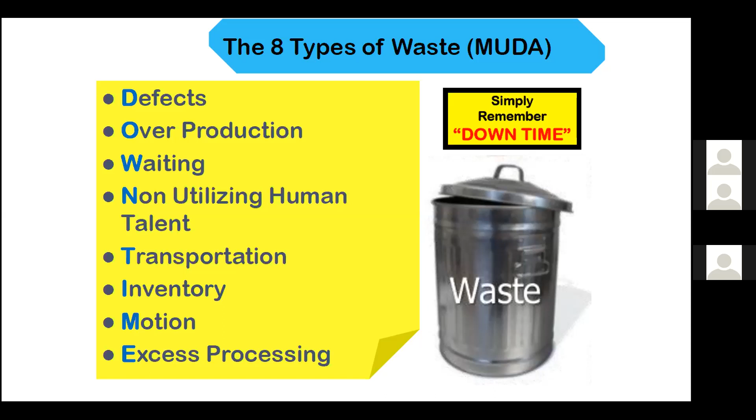D means defects. O means overproduction. W means waiting. N means non-utilizing human talent. I told about the 8th waste, the same one, non-utilizing human talent. T means transportation. I means inventory. M means motion, and E means excess processing. So these are the 8 wastes. Let me go one by one.

So before going into detail, I am just telling you this waste is applicable everywhere. It's not only manufacturing, not only healthcare, banking sector, education sector, everywhere. So I've just put some slides on how each waste is applicable in different sectors. The first sector is education. Let me take any one waste.

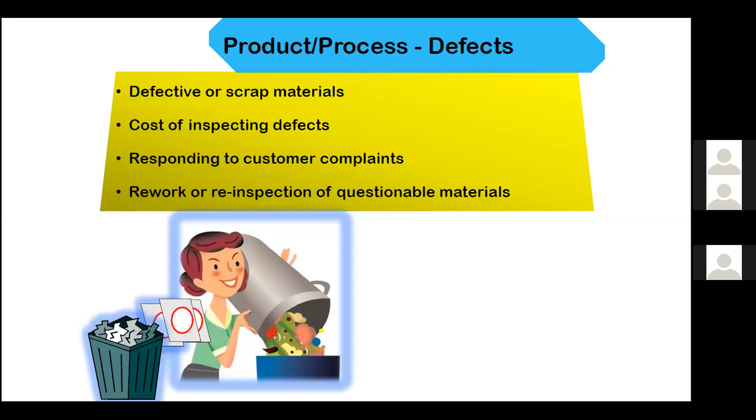So defective or scrap materials, cost of inspecting defects, responding to the customer complaints. Yes, if there is any defect and you find it at the design stage, the cost is very less. If you find it at the processing stage, the cost will be different. Once it reaches the customer, then it will multiply the cost. So responding to the customer complaints, 8D, whatever we do, everything is related to the waste of defects, rework, re-inspection. Okay, so all this is a part of defect waste.

So why must rework, repair, replacement, warranty period be MUDA? Why do we call it MUDA? What will happen when there is an assembly line? Let us assume there is an assembly process. Okay, the first person is doing the work, second person is doing the work, third person is doing the work. Something happens at the assembly stage itself. Whatever effort they are giving, that will become waste. So that is in a production line.

During the warranty period, what happens? Let us assume a customer ordered something from some online shopping center. He ordered a birthday gift for his wife. Due to transportation, or because they delivered a wrong product, when he opened it, he received a different product. So the day became dull. So the customer has a very big wrong impression about that particular process, particular service. So that is very important in defects.

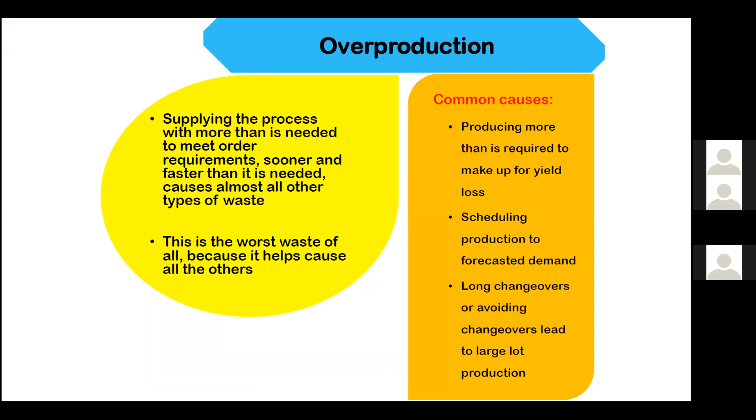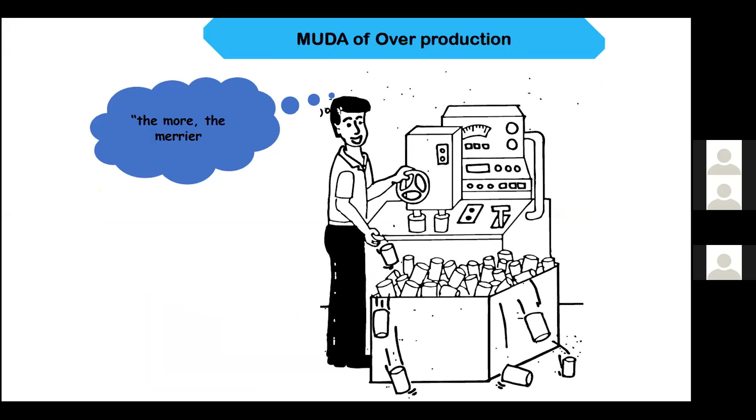If you are producing extra, what will happen? The customer is not happy to buy that. And the second thing, whatever time and man hours you spend will become a waste in this particular process. And if you are producing more files, more product, you don't have the space to keep it, so the respect for the product or process will reduce.

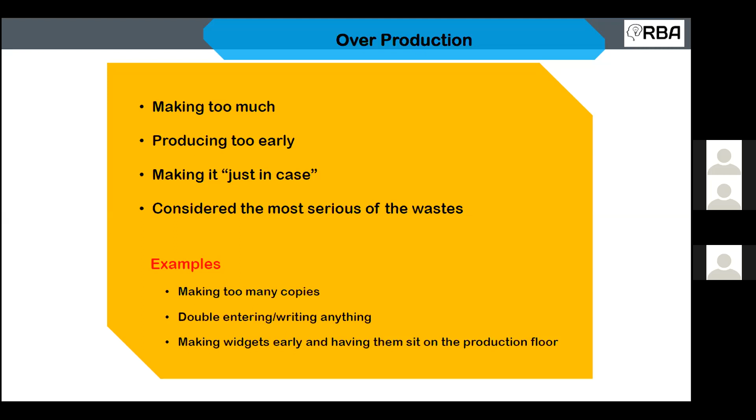How can we identify it? Making too much, producing too early, making just in case. Consider it the most serious waste. Some examples are making too many copies. Suppose we want to take one photocopy, but we are taking 2-3. Double entering the data, entering the data 2 times, repeated data in a mail. So these are the things related with overproduction.

Waiting. So waiting is always the biggest waste, particularly in a service industry. Waiting means waiting for man, waiting for machine, or waiting for process. What should be next? So for any reason, man, machine, method, material, whatever the reason, if the process is stopped and waits, then that becomes waste. What is the impact of the waste of waiting? It will increase your lead time.

Let us assume one person comes to the bank. He wants to apply for a loan. For loan processing, some data is required. He provides the data. If one person is delaying, or one person is waiting for some Xerox copy, or waiting for some person to come and give an approval signature, then normally it takes some 2 hours, but because all this waiting time is added, it will become a 2 days, 3 days process. So nobody will like waiting time. It increases your lead time. It increases your turnaround time.

So normally, what are the reasons we wait? We can remember 4M: man, machine, method, material. Waiting for man: somebody needs to come to give the signature, give this approval, clarify this. Or related with the material, some documents need to come. Waiting for the method, what to do next? There is no clarity, there is no SOP, or in some critical case, how to proceed further. There is no procedure available, no instruction available.

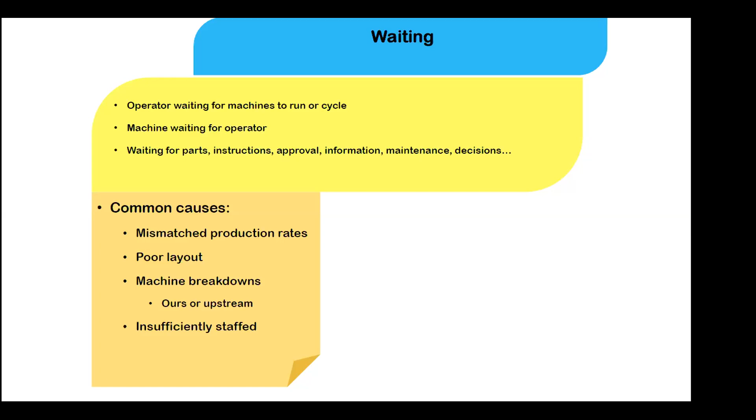So like this, man, machine, method, material. All these reasons we can relate with the machine too. If you talk, there is waiting for some printer, waiting for some photocopier. Because of that, we are waiting. So related with all 4 M's, waiting will be happening. So we need to focus on waiting, analyze for what reason we are waiting, and accordingly we need to take a countermeasure.

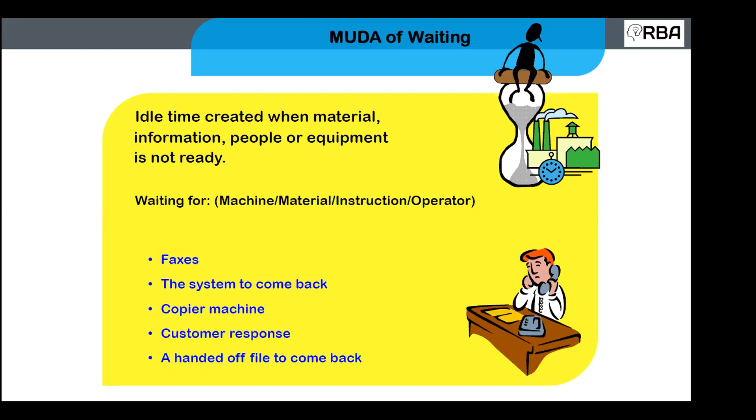So idle time is created when the material, information, people or equipment is not ready. Waiting for fax, waiting for the system to come back, waiting for the copier machine, waiting for customer to respond. These are things we are waiting for. Simple example: the machine is broken down, so the person is simply waiting. But we are paying salary to the person also. The machine is broken down, what will he do? He is waiting.

Unutilized human talent, non-utilized human talent. So how can we identify this particular waste? If the person has good skill in particular work and you are not allocating that work to that person, that is the greatest example of non-utilizing human talent. Let us assume one person has very good skill in customer care or marketing, but we are putting that person into core operations, so we are not utilizing his skill. In a manufacturing process example, the person has very good skill in painting, but we are putting that person into the welding department. So we are not allocating the job as per his skill. That is one example of non-utilizing human talent.

Another way: the person has a good idea, so he is giving one suggestion. Instead of this, if you do like this, we can reduce the people waiting time, so we can attend more customers. But if we are not hearing his idea and not implementing it, that is also called human talent waste.

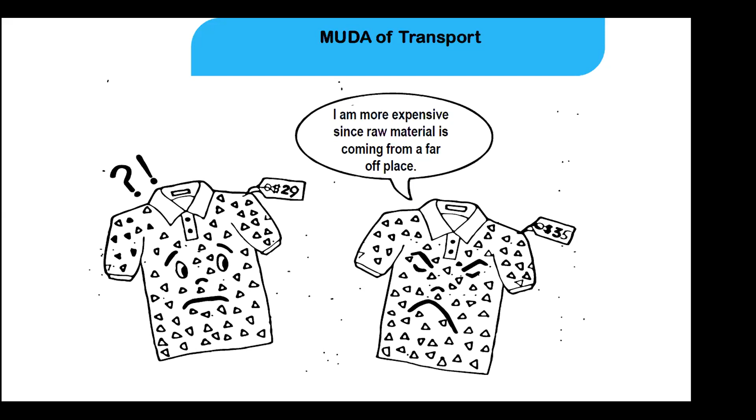Suppose my supplier is at a very long distance. I cannot buy from nearby suppliers because they are too costly; I can buy only from the long-distance supplier. It's okay. We cannot change that supplier's position, and we cannot change our position because of that supplier. So what is in our scope: within our plant, our service area, our hospital, our bank, how can we reduce this transportation movement? We can focus on that.

So carrying documents from one area to another area, taking files from one person to another person, going to get the signatures. Let us assume tomorrow is a holiday; due to some reason we need to put the college on leave for all people. So the communication needs to go to all department HODs. What happens? There is one attender, he will take the circular. First he'll go to the principal's office and take the signature, then he needs to go to all the department HODs to give this communication and get the signature.

So all these HODs, all these departments are not very close together, no? So the person needs to walk here and there along with this material for too long. So transportation is very long in this situation. So we need to avoid the transportation by providing the communication in digital versions. Use WhatsApp or emails, phones. We need to use like this.

Inventory. So inventory means anything more than required. If you are keeping that, that is inventory. So if I'm doing one at a time, everybody is able to work on one file only, I hope. So we are able to concentrate. We cannot concentrate on more than 2 files. More than 2 files at a time is very difficult. Myself, I cannot concentrate on more than one file at a time. But if you are keeping many files on your table to show off, 'oh, I'm working on huge files, I'm multi-talented', if you want to show like this, that is inventory.

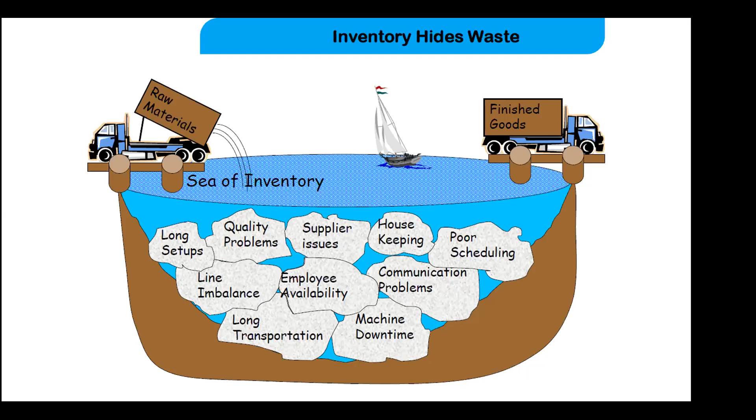So in the office printer, let us assume we have only one cartridge, and the next cartridge order will be placed after 30 days. Then you will take care of this cartridge very well. If you have a number of cartridges in the office, then for some small problem we will not take care of the printer; we will throw this cartridge and put in another cartridge. So carelessness becomes very critical. It becomes very dangerous if you have more inventory. If you have just enough inventory, the care for that particular equipment becomes more important. When you are reducing the inventory, all the problems will surface. Maybe the printer has some problem, and that printer consumes more cartridges.

We don't know, but because we have more cartridges, whenever there is a problem, we immediately throw away the old cartridge. If we replace it with a new one, we never come to know the printer has a problem. But if we have only one cartridge, then we come to know the printer has a problem. So problems become highlighted when the inventory starts reducing.

If you have more manpower, let's assume manpower is also like inventory. If you have more manpower, the problems are hidden. When you have less manpower, only then you realize the SOP is not clear, or this particular process takes more lead time. That is the input, so all these problems get highlighted. Whenever the problem is highlighted, only then can we take action and solve it. Otherwise, problems are always hidden and we are living with the problems. So we want to avoid that situation.

Let's assume you need to take a print every time, so you are walking every time, or you want a signature every time and you are walking. The walking time by the individual person is called motion.

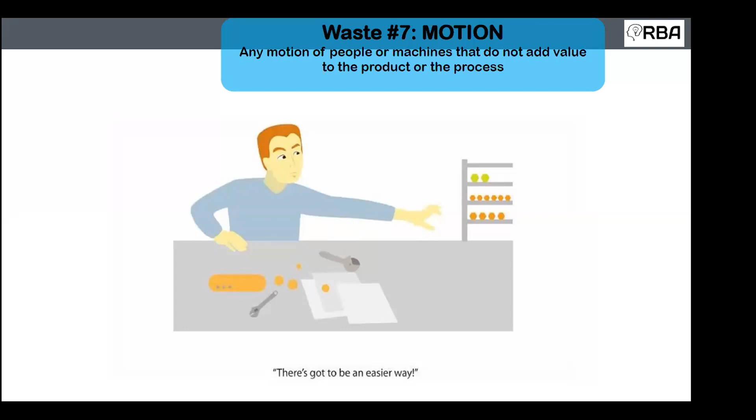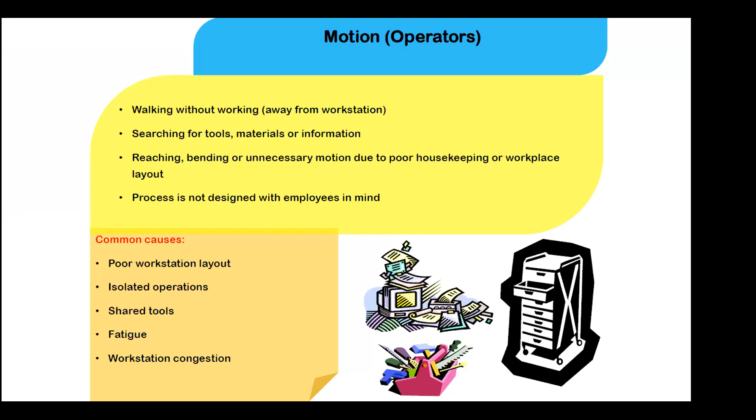So yes, isolated operations with shared tools, there are no common tools. Staplers in some offices are common; if one person wants a stapler, he'll walk here and there for some shared tool, causing fatigue. So these are the things we need to focus on in this motion category.

Motion versus transportation difference: motion means the operator movement, the employee movement. Transportation is document or material movement.

Excess processing: if you are doing more than required, like using the highest-spec tool when it's more than enough for a particular product, that is called excess processing. Using more than required consumes more power and more cost, but it's still not adding value to the customer. Customer is not getting any value from this, but we are consuming more. So those are examples of excess processing.

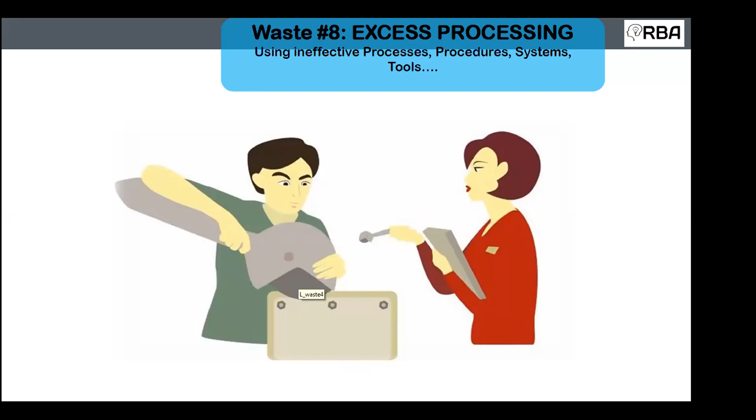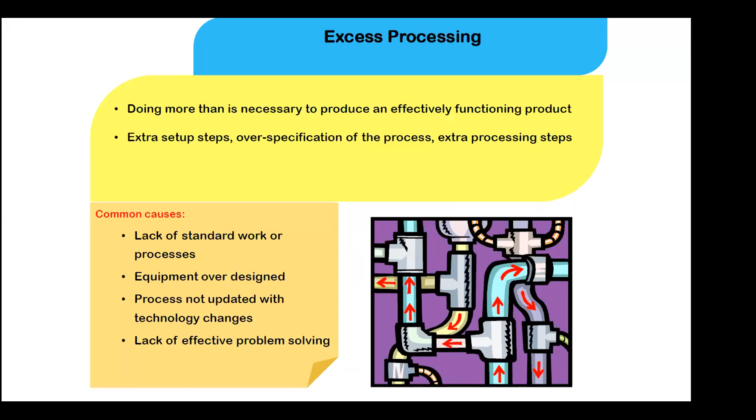So why does it happen? Because of no standard work, we are not creating procedures. Some things are over-designed. Lack of problem solving. These are the reasons, using expensive things.

For giving communication, for example, if we want to give some communication to the customers, a normal print is enough. But if you are giving a high quality printer output when only the matter is communication, the communication is what matters. If you are giving some hi-fi printer output with the logo and all these things, that is not going to add any extra value to the customer.

Same thing, if you got a communication but you are giving a high-fi printer or high-cost quality paper, it's not going to add much value to the customer. So that is called excess processing.

Meetings not required, but we have every meeting, always meetings. So small things also we started meeting. For small things, if you want to give communication, just 2 minutes is enough. But if the meeting is happening at Gemba, automatically the time will reduce. If you are having a meeting room, you block the meeting room, then 10 members need to come - that is called excess processing.

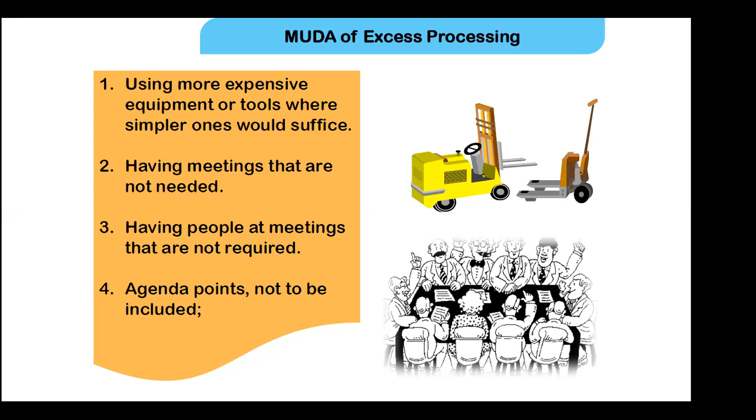More than required members conducting a meeting, that also is excess processing. Agenda points not included, so homework is not done, then people came and attended - that also is excess processing.

Creating reports more than required, repeated manual entry of data. Sometimes if you do the study of your entire office, somebody is doing duplicate work - the same person doing the same work in two different ways. So the repeated manual entry work, all these things also come under excess processing.

Duplicacy of work, use of outdated standard forms. The person using outdated standard forms, again after some time it comes up - oh, we need to change that. This is excess. Inappropriate software, if you are using that, also called excess processing.

Very important thing is, first we need to see the waste. If you are a daily worker - see, normally when any new joinee in a company joins, after 3 months the HR or the business head will call this employee and ask, okay, now 3 months are over, how do you feel about this company, what good things do you find, what things need to change here. If asked, that person will give the answer. Normally the first 3 months is called a honeymoon period.

So whatever he learned, he will share. But a person who worked for so many years, 5 years, 6 years - after that if the same HR or business head calls and asks the question, he cannot give answers because he is also part of that ocean.

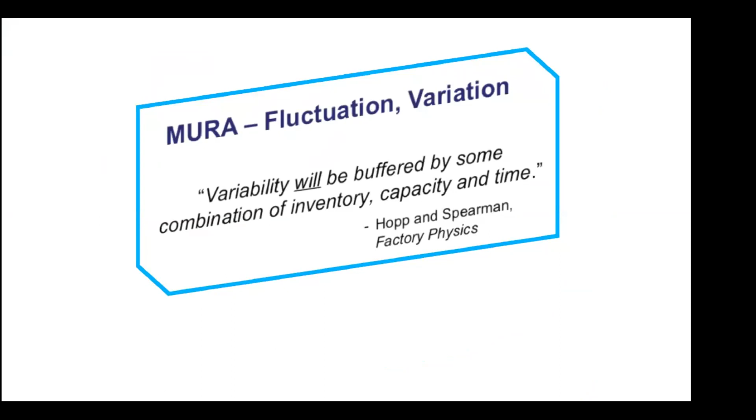Muri, as I told you - now whatever we've seen about Mura and Muri, that is a fluctuation or variation. Sorry, it's Mura only, not Muri - that was the wrong thing. Mura means variation, so Mura is inconsistent or irregular, uneven use of persons. Wherever there is variation or imbalance, that is called Mura.

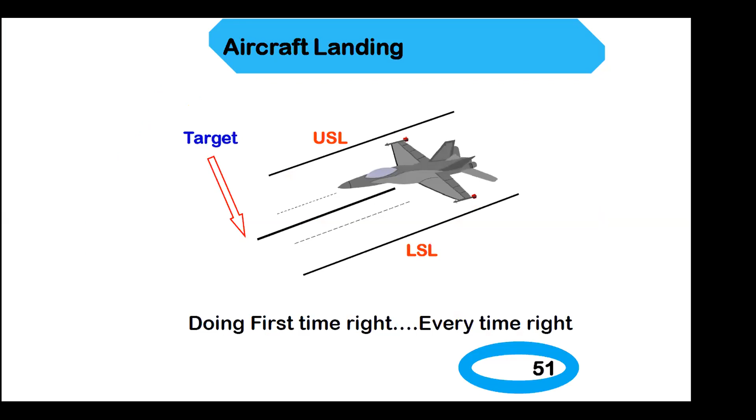So the flight is supposed to land within that path - there is some upper specification, lower specification. If there is some change, what happens is that will create a big accident. So that is a variation, and we can see how it can affect an important role. So the last one is Muri.

Even not only the physical thing - mentally also, if you are giving some non-validated work, the person feels it, and that will create physical issues to that person. So for that, normally we need to do an ergonomic study.

The best tool as of now, if you want to do it for the service sector or manufacturing, the simple method is REBA study - Rapid Entire Body Assessment. That is a very simple one; anyone can able to do it. You can search in Google for this study and get a simple SOP sheet.

Using this sheet, we can able to identify currently what is the ergonomic score of this person. From the score, guidelines are given in that sheet on where we need to improve. You can search REBA, Rapid Entire Body Assessment, in Google - you'll get the details, or you can connect with me and I will share the details. So these are some of the ergonomics improvement projects happening in the plant.

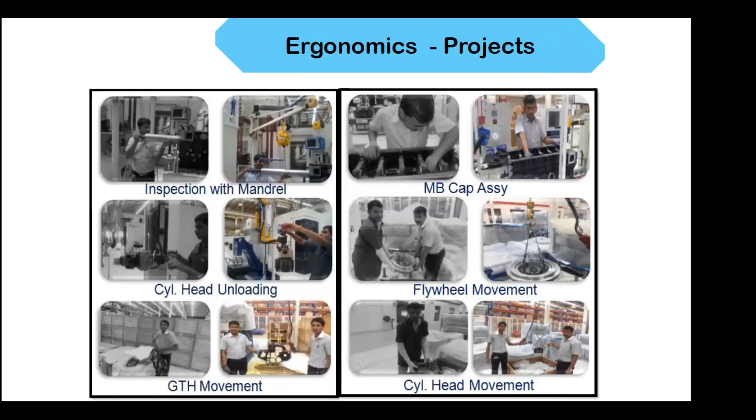Map the value stream. Value stream mapping is like a visual tool to show the entire office, entire business, how your values flow, what is your process, where are the values happening, how much non-valued activity is happening, what is your lead time versus your value-added time. It shows how your material flow is happening, how your communication and information flow is happening. Everything is shown in a single picture, that is called value stream mapping.

We can do this for hospitals, for banks, for manufacturing, everywhere we can do this. This is one of the things we need to do, by picturizing that entire process.

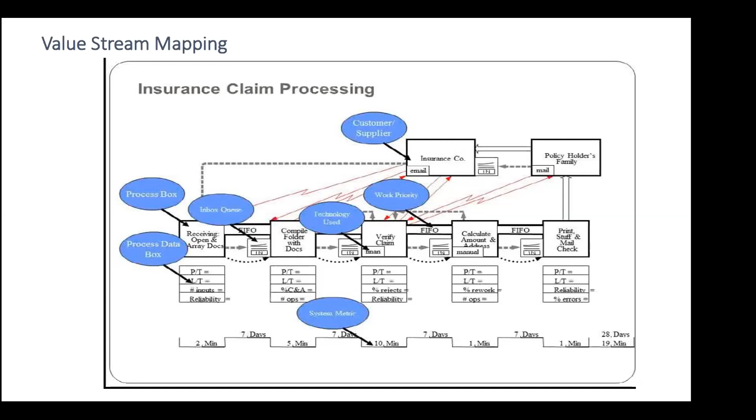By doing VSM, nothing actually changes. It's like an X-ray. It will show what areas are good in your body and what areas are in pain, so what kind of treatment is required and how long it will take. So for developing roadmaps and taking on projects, it will be good.